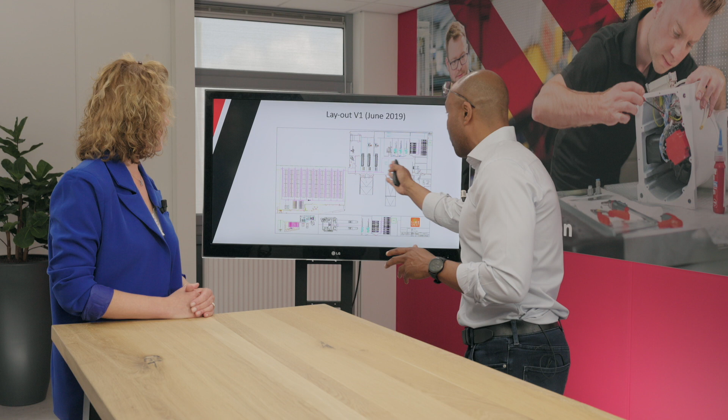This is, let's say, the primary design, where you see a part of the warehouse and a part of the production area, and just a few AGVs. That was, let's say, the first scope, June 2019. And during the way towards LiveKindly, this is, let's say, the new layout, where you see that things have been extended extremely. Small thing - we just doubled the warehouse capacity, and we do also occupy the freezing department with a fully automated warehouse system. And then we work with 3 AGVs.

That's a challenging change of scope. Yeah, absolutely. Normally, we always say to our customers, when you want to implement an AGV system, you need to be aware of at least 3 to 6 months of headache and problems you will have in your process. And most of the customers, they talk, of course, with a lot of suppliers, and many times nobody talks about that period, because it's extremely difficult. We call it almost comparable with top sport - you get every day new surprises, and most of the times, those surprises you do not benefit from.

Everybody needs to be aware how it's working exactly and what kind of impact it has on the company. Absolutely, that's, I think, the main goal, main target, that up front you start to discuss with the customer all the minor details and all the problems which occur, so that the customer knows upfront what he will buy or what he will get. And you can imagine if you only talk about the sunshine and during the implementation it's only raining, everybody is sad. But if you warn upfront that there will be rain, there will be snow, everybody knows and understands that after the snow, the sunshine will come. We look forward, everybody, to that moment.

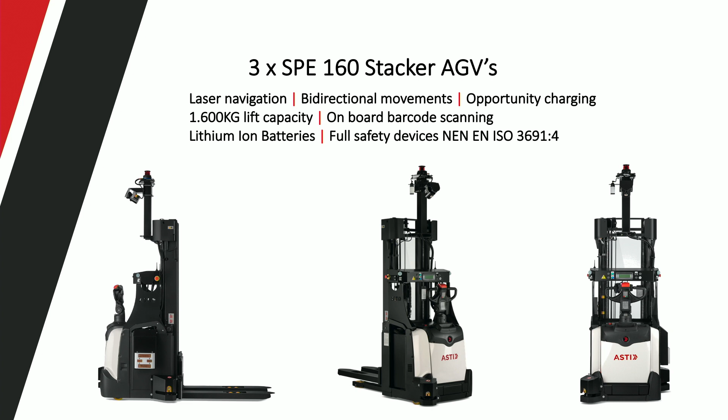If you look at the safety devices, which are part of the NEN EN ISO 3691-4, that's the Bible on which you can produce AGVs. One of them is, of course, how do you avoid collision? Because again, 3.5 to 4,000 kilograms of mass is driving through your warehouse. You should not imagine that someone gets smashed between the wall and the AGV. So avoiding collision is the most important device an AGV must have.

Most of the manufacturers work with a laser scanner, and the laser scanner detects objects. When it detects an object, the activity of the AGV will change.

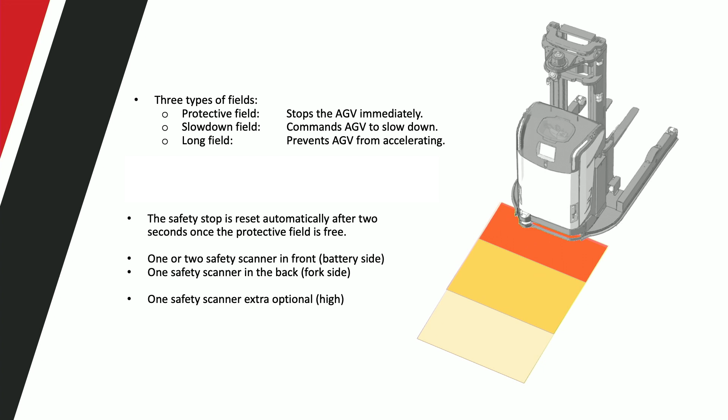For example, you see here the 3 phases in the scanning field. In the first phase, when it detects an object, it will not accelerate anymore. In the second phase, when it detects an object, it will downsize, it will brake down slowly. And when an object is still there, and you get into the orange-red area, the AGV will stop completely, and it will stop until the object is moved. So that is very important.

Most of the time, there are only a few manufacturers of those scanners. They need to be certified, of course, because it can be the difference between life and death. So these are quite expensive scanners, and the programming also needs to be done in a certified way. Safety is everything - you can imagine we work with a lot of corporate companies, and ABB ASTI itself is a corporate company. You cannot imagine or ever have a collision with someone that might jeopardize your business completely. So it's the most important part, of course.

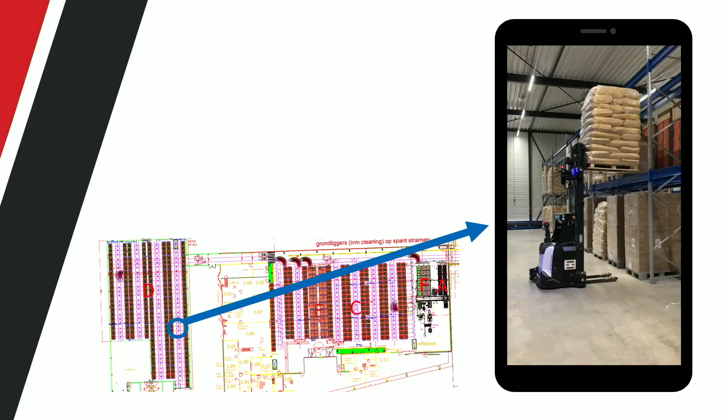What we try to show you is that we are able to interface with racking systems. That is something typical because, for example, the flatness of the floor is extremely important, the bending of the mast is extremely important, the distance between the pallets - everything and every millimeter counts. It looks so simple and easy, but it's everything but that.

What's also very important is when you start a project, most of the time you ask for the layout. We work with AutoCAD, so you get a DWG file. And what we learned is that every customer tells us this drawing is correct, but we have experienced a lot that everything but correct is the drawing. So we need to always measure the environment to be sure that things are right or wrong, because again, with AGVs, it's all about millimeters.

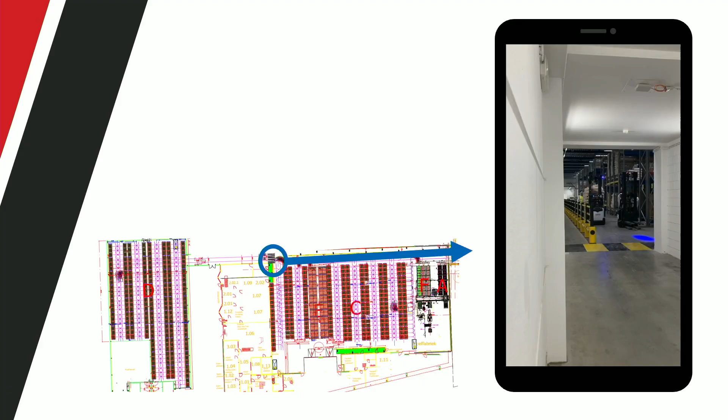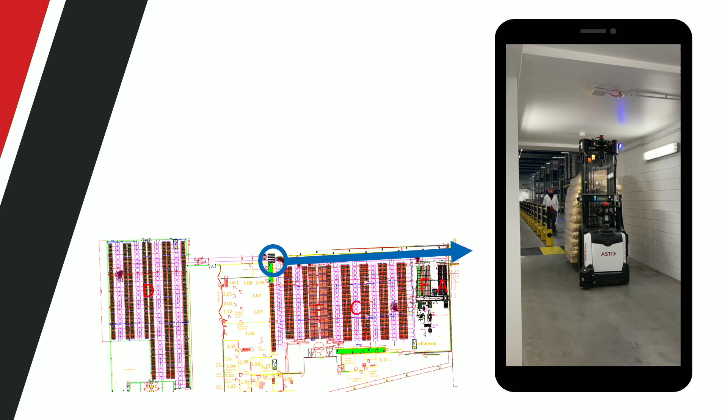Here you see an example. This is a corridor - we originally had 2 driving routes, one forth, one back. But during the installation, maybe 1 week before, we measured and found a discrepancy between the original drawing and the reality. So then we needed to move back to 1 driving route, which is not giving any problems here. But if you have tight capacity, then you can imagine that when you cannot pass each other, you have a problem because of capacity downsizing.

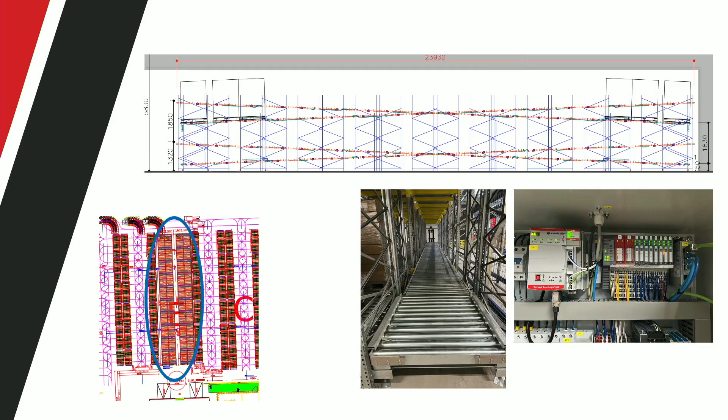Here you see the example of the expedition area, where we try to design as efficiently as possible. We work with gravity conveyors, about 20 meters long, so 8 units. But gravity conveyors in collaboration with AGVs is a no-go. So why? I will explain you.

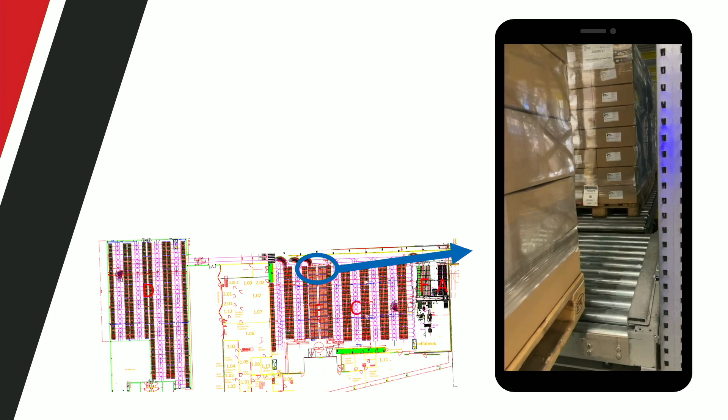If you look at this picture, when an AGV picks up the pallet, the end of the conveyor needs to not have a gravity percentage, but needs to be horizontal, 100%. Here you can see that the pallet at the end of the roller bed is always a little bit offset, and we need to centralize it completely to a fixed zero point. And here you can see we slightly change the gravity towards horizontal, because the AGV does not have any tilt functionality. The forks are straight, and if the pallet has this gravity of 4%, then we cannot enter the pallet fully without colliding with the wood. So it looks simple, but there's a lot of thinking behind it.

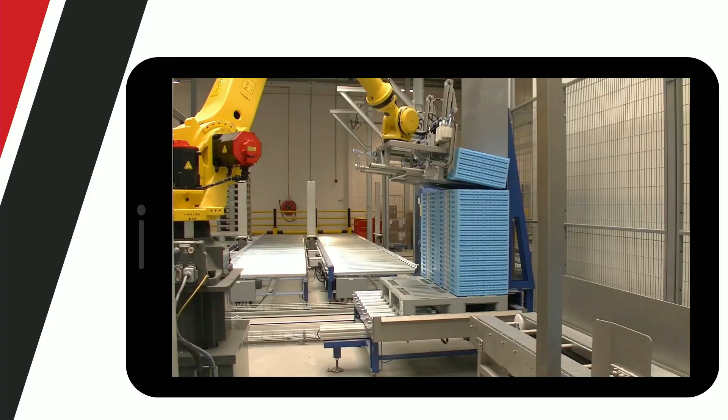Well, what we see here on the video is that the robot takes stacks with folded crates from the pallet, places it on the conveyor belt, and the conveyor belt takes the stacks with it into the crate erector.

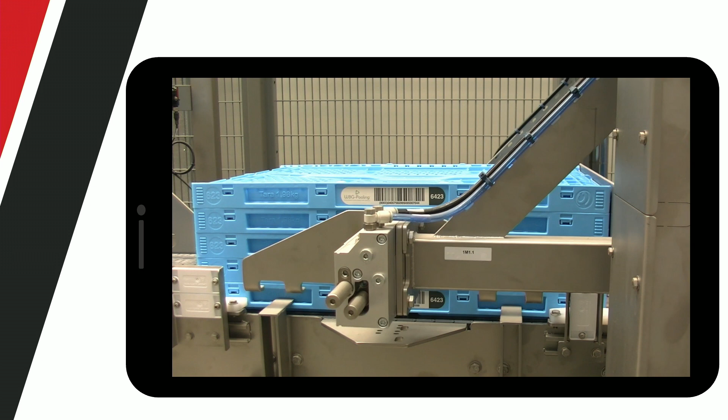Here you see one crate taken away from the bottom, moved to the shift table, and the folded crate is falling down, held by the grippers. But then the walls are falling open, so we fix them, lock the walls, and then flip it back and take it with the conveyor.

And we can check if the crates are folded open correctly. If not, we can recheck them.

In this case, when a pallet is empty, the robot will take the empty pallet to the other conveyor. We gather here some more empty pallets, and when we have a stack of empty pallets, we will give it back to your system. So it's a nice cooperation.

The loop is closed, and we get the pallet of the stack of pallets back from your device. We will stock it somewhere in the warehouse.

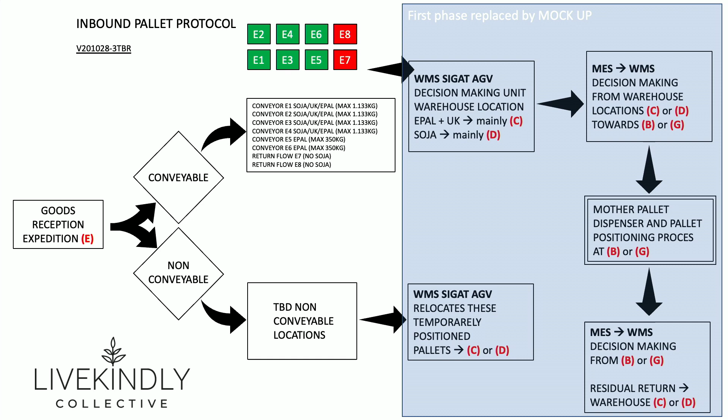Something very important: if you want to automate your warehouse or production area, you need to be very clear about the pallet protocol. You need to know what kind of flow you need to follow, what the agreements are, what the sizes and overhang are, all kinds of details which are standard for normal manual actions.

They might be exceptions for the AGV. But does every company have a clear view of what they are using? No. We talk to a lot of customers, and of course they know high-over what they do, but an AGV system cannot be designed on a high-over design.

You need to dive into the minor details because it can come down to millimeters whether you have a problem or not. When a complete system will run or fail might depend on millimeters.

So what we do is make the inbound pallet protocol part of the pallet requirements, so everybody knows in what kind of condition the pallet needs to be. It's not like 90% or 95%, no—100% of the pallets need to be correct, and then we can guarantee 100% functionality from the system.

Our experience with customers is that we install a line of equipment based on several specifications, and then the customer comes to us saying, 'We have a question, we need to move to another specification'—maybe in your case, another pallet. Can you adjust the system then? Or what steps can be taken?

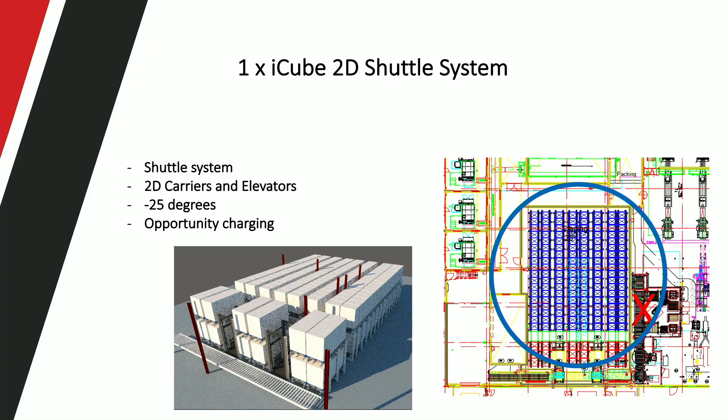We were also requested by the customer to supply a solution for their freezing department. They have 24/7 production for frozen products and only 5 days, 16 hours a day outbound. So they need a buffer area where they wanted a fully automated solution to stock as many pallets as possible.

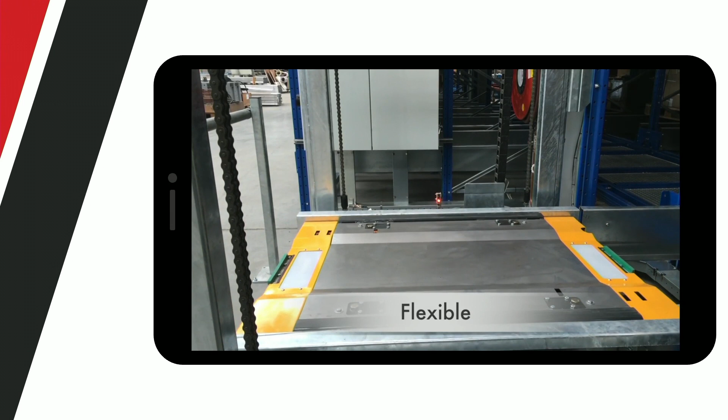So we came up with the 4-way shuttle solution, the iCube. As you can see in the movie, the shuttle is not only driving forward and backward, but also left and right. That gives a very compact solution where you can have the most optimized density of storage.

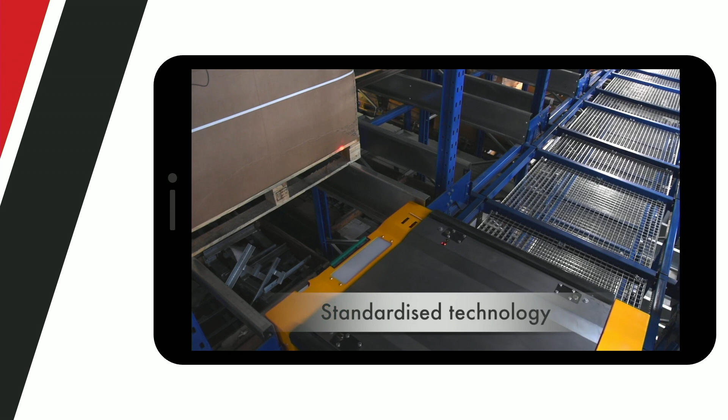And how is it then with the temperature? Because I saw minus 25 degrees. Does that have influence on the AGVs, on the iCubes? It has influence, but mainly on the battery capacity, because if a battery is operating in a frozen environment, it cannot hold as long as in a normal environment. But the product itself—the lift, the elevators, the shuttles, and the racking—they can stand minus 25.

Well, it's looking good. So that was our explanation about the use case, LiveKindly. We are almost finished. The second phase will start during the summer, and after the summer we will hand over the iCube system, so then we are fully aligned with the agreement.